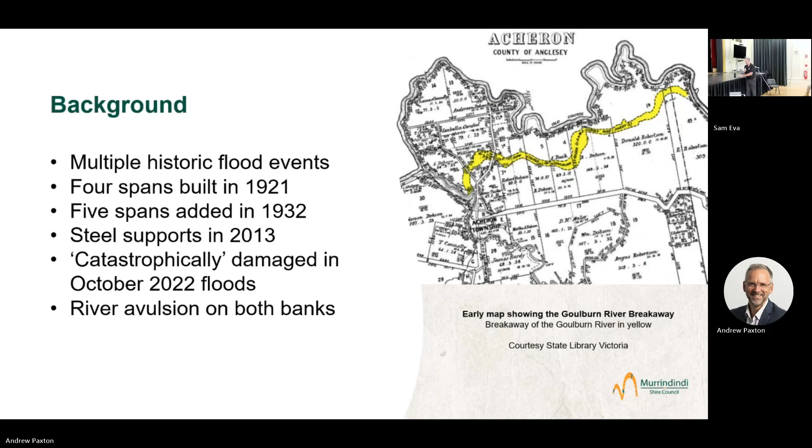The disaster recovery funding arrangement, you'll hear that on the way through. At our last meeting, there was a heavy conversation around, is council insured or not insured? Council insures its assets - buildings, parks, things like that. Our critical or essential assets across the whole of Australia are covered by what they call the Disaster Recovery Funding Arrangement, which is between the state and federal government and how they support councils. So in that flood event in 2022, all the councils collectively had more than $500,000 worth of damage. Therefore, it falls straight into it and they assign it a number, and you can make claims against that in that process. So all the critical assets - roads, bridges, culverts - are covered by the Disaster Recovery Funding Arrangement, state and federal agreement.

The important part of that is it restores the function of essential assets. So if we had a road that had potholes in it and then gets washed away, we don't get funded for the potholes that were in the road. We only get funded for the state the road was in and the function the road had prior. There is an ability to claim immediate protection works, and you may remember after the floods, the rock embankments were put on the side. That was funded through this process to protect the banks and stop them further eroding. That falls under immediate protection works.

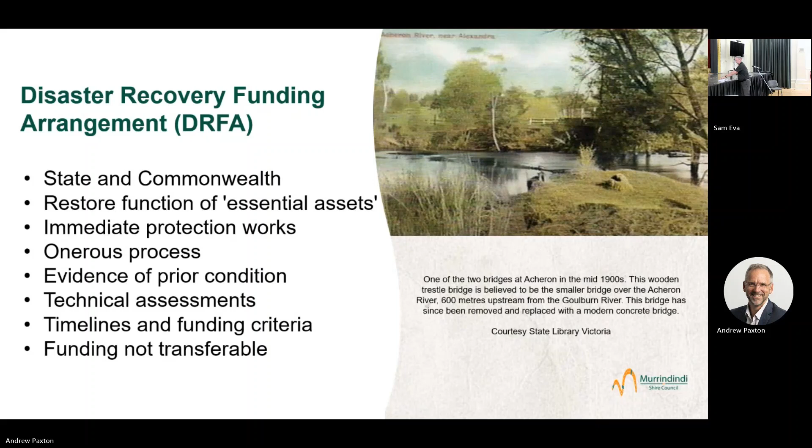As you can imagine, with any government process, life is not always easy. There's a whole series of agencies, especially when you're dealing with water and rivers and roads. So we've got the Goulburn Broken Catchment Management Authority - they're responsible for the bed and banks of rivers. We've got Goulburn Murray Water, responsible for the water flows and some of the bed materials. Emergency Recovery Victoria, they coordinate claims with the federal government. We've got the Department of Transport and Planning, who actually assess the claims to make sure they're valid. We've got the National Emergency Management Authority in Canberra, that then has to say we're satisfied, that Victoria's satisfied, that the auditors will be satisfied to get the money back. And we've got council engineers, because we end up inheriting the asset and need to look after it, or we need to actually justify what we're doing for the ratepayers.

So I'm just going to start with a bit of the background, and I'll hand across to Peter to talk about the detail and the technical assessments.

Once an asset is damaged, and this one, we had to get technical assessments on the banks first, a design, have that approved through the department, and then we could put the rock beaching to protect the banks. At the same time, our engineers have gone through and engaged engineers to assess the bridge structure, the footings, the banks of the river, and all the other elements.

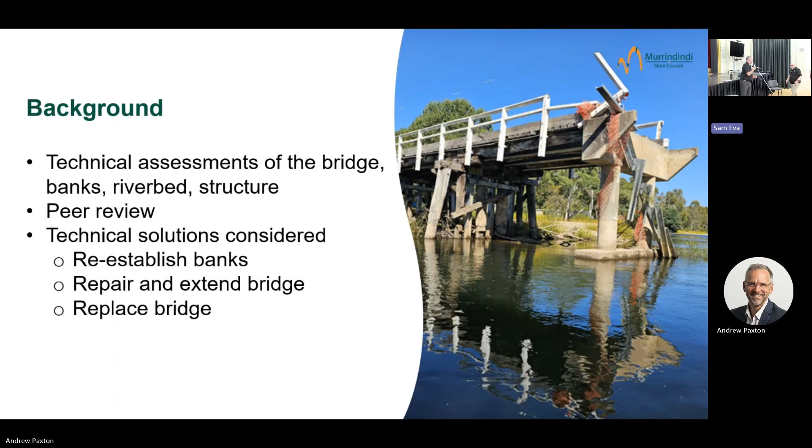Thanks, Andrew. I'm Peter Bain, the engineering manager from the Shire.

So after the '22 flood, we did initial investigations. We made our initial claim through the DRFA process in '23. And since March, we've been on the treadmill trying to get the approval through to continue the work, to actually make a decision as to where we're going.

So think of it as the insurance, as Andrew said. They'll only fund for replacing our bridge with exactly the same function, not necessarily the same bridge, but the same function, a single lane bridge. Now, since it's over 100 years old, the bridge standards have changed considerably, and safety standards. So we had this big long argument about which standard we were going to use and what level. That's been going on for some time.

Our partners, such as the GBCMA, have been also doing some studies, and they've done a report for us talking about what the river's going to do, and that's coloured the process that we've got at the moment. So they're saying that the river is moving and it will continue to move, and it's likely to move north and east.

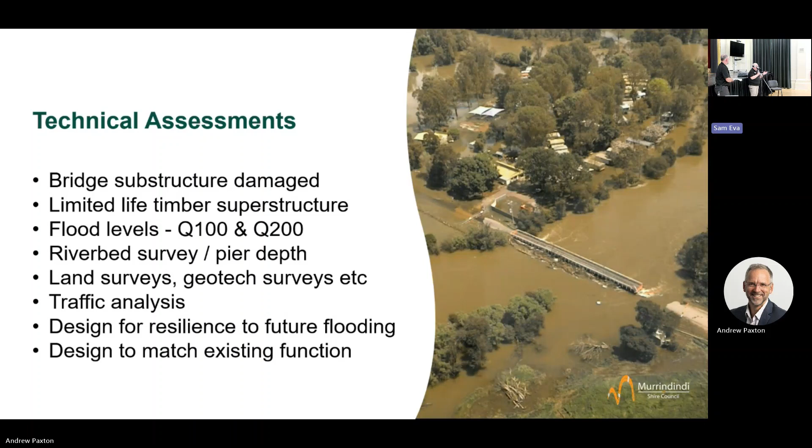The Commonwealth and the state have sort of agreed on how much they've got to spend on the bridge, and we'll see where we get to. So the scenarios are single lane, or dual lane, which we prefer from a safety point of view. And if all else failed and we had no money, then the community decision is that we'd have to close the road and the bridge.

So the state government, in that whole approval process, we've had to demonstrate. Initially, it started out, they said build the banks back to the bridge. The CMA said no, not allowed to adjust the river flow. So now we've got everyone aligned and saying the river flow can't change. And they've agreed to a quantity surveyor estimate saying what would it look like, what would it cost, what are the orders.

That's how controlled it is. They wanted to see what we're actually asking in that tender document and make sure it's clear with what's in their scope. If you've seen council's budget, you'll know very clearly we're not in a position to build the bridge or to top up funding for the bridge. So the gold plating version is not an option for council.

We went out to the tender process for multiple options so we could make an informed decision. At the moment, it's a quantity surveyors and engineers estimate of what it's going to be. So by going out to market, we'll know exactly what the true accurate figures are, what the timelines are, and any conditions tied to that. So that's gone out to tender, and anybody who follows our web page will notice that's on there.

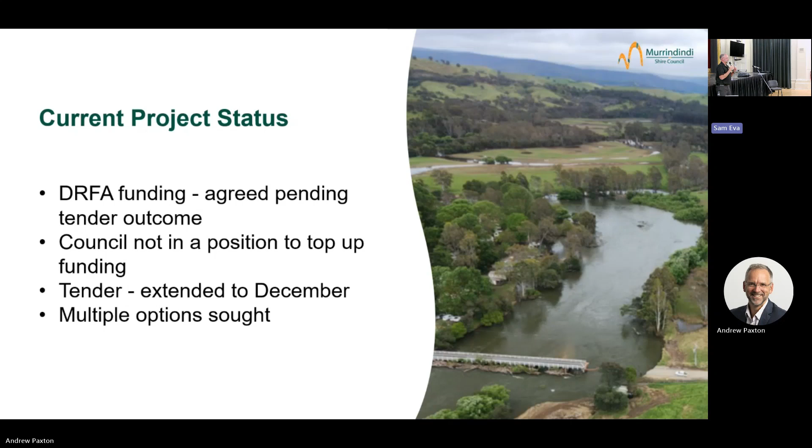With anything, everyone in this room would have differing views or different aspects on views and would weight things slightly different. We've heard there's an additional cost for business. We've heard the one way in and out in an emergency is an issue. We've heard that response times for emergencies is increased to get to different areas. We hear from the community it's physically divided.

It takes more time to connect with neighbours and work. The loss in local spend at the caravan park from having to drive further around, when in the past they could duck into Alexandra, and the grandfather test. People say, what are you going to do for the future generation? What's the long-term solution? What's not just today? What's not the Band-Aid? What will my grandchildren appreciate?

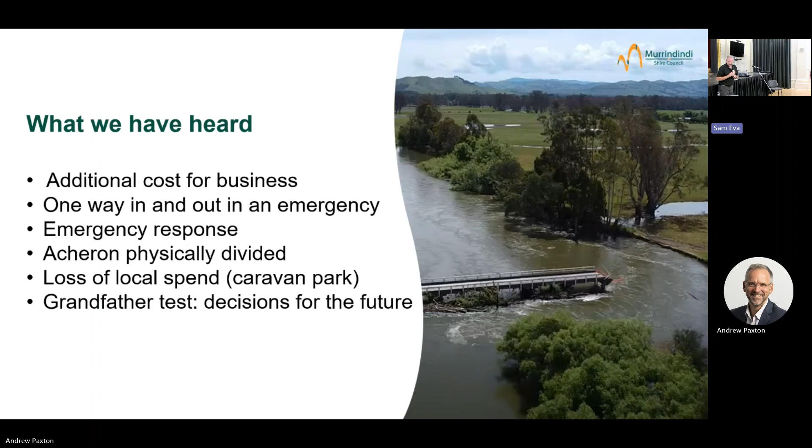We also heard some people that would prefer no bridge, and they said that will increase traffic. We've also heard that having the increased traffic will lead to safety concerns of speeding traffic and increased use of heavy vehicles through that area. We've also heard very clearly that there's concern about increased traffic going through Alexandra and Grant Street and the impact that has, and also on the intersections onto the highway.

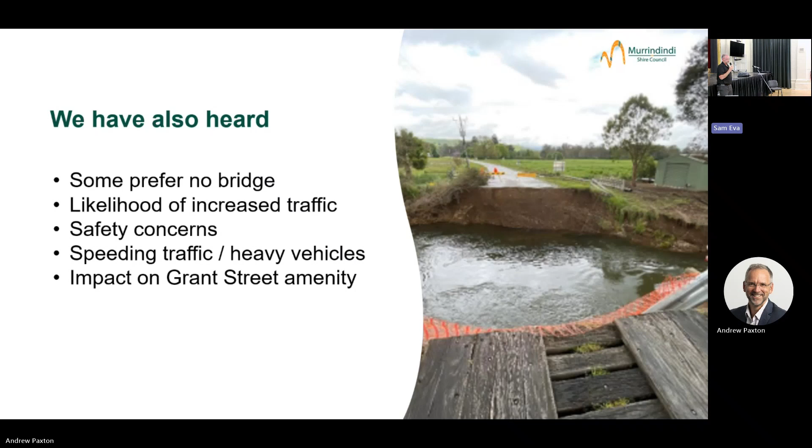So we have been listening. We've got a whole lot of feedback, and I've just tried to see them at that high level just there.

Some of the options that we've explored was to repair the bridge, that was to extend the existing bridge, as the assessors originally said you need to extend it. That's over 30 metres in extension to the bridge, and the engineers all said it will fail in the future. There's a really good chance it's going to fail. It's a case of how quickly it fails if you extend the bridge, and how do you tie a modern structure or a heavy-duty structure to a timber bridge that is moving when you're on it. So finally we've got the engineers with the state and council and all the specialists to agree that's not a feasible option to extend the bridge.

The option of bringing the banks out to the bridge has been dismissed as not an option. We cannot do that.

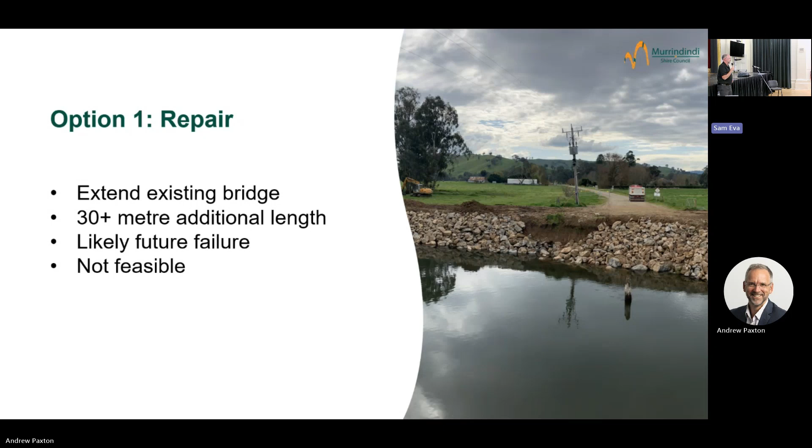The option of replacing the bridge, that's constructing a new bridge. There's two options there which exist. One is a single lane bridge like we had in the past. The second option is a dual lane bridge. Whatever we do, we need to build back something that our grandchildren and future generations can make use of. We don't want to be back there replacing and fixing the bridge every time.

We know that we made submissions to the flood inquiries, and we asked and pleaded for Eildon to be used to stop flood events. We made submissions to the inquiry. That option of using Eildon to hold back water in a flood event was dismissed by the state government. So that's not an option.

We know the river's going to go high. We know we need to build a bridge that can either be topped by water going over it, or is strong enough to take that, or is up in the air and can deal with that. We know that we can't build a bridge to the standards of the old bridge. It has to be built to a contemporary standard. If you look at the bridges of the past compared to what they are now, the expectation from the community and people who drive on those is a contemporary standard. It has to meet safety standards. And that will lead to being that increased deck height or being able to be topped by water going over it in a flood event.

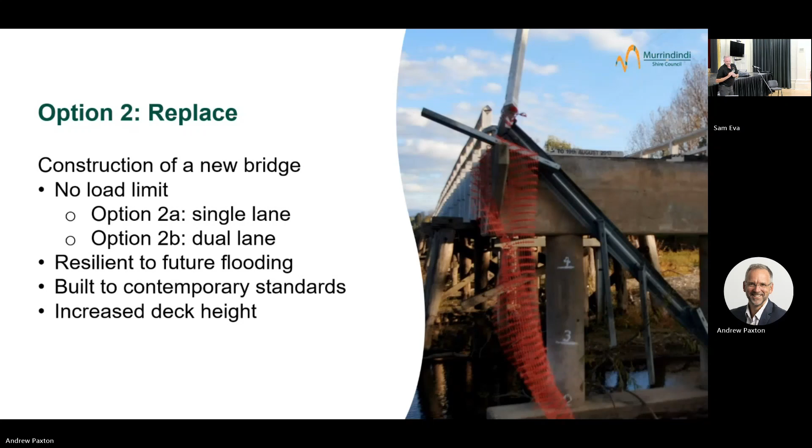The option of no bridge - so in this process, the DRFA agreed it is an eligible event. They have agreed it's an eligible asset, and its replacement can be funded through that program. We can't take the money and run, and it is deemed as a critical link or a part of our transport network. And their advice is it's not really an option to say no to a bridge.

So the default position at this stage, while we've gone out to tender, is to restore access and construct a resilient and a functional bridge for the future. That doesn't mean a decision's made. It means we've gone out to the tender on a range of options that includes that as a premise.

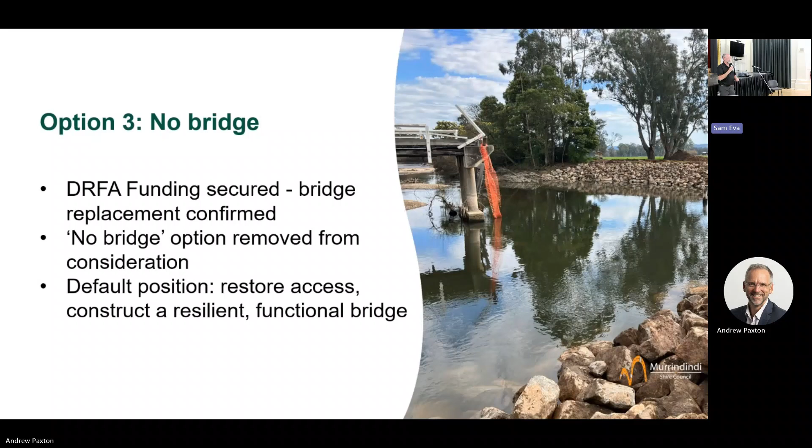So with the 2A option, the DRFA have signed off on that being in the tender documents. A single lane bridge, about 105 metres long, in a foggy environment.

That's why it needs to have traffic lights, and it will need a backup supply, because we know the power went off twice here yesterday. We know power goes off, so it needs stuff there to make sure it's safe for the community in a foggy environment when the power goes off.

The 105 metres is a long way when you can't see over the crest of a bridge, or you can't see that length in fog.

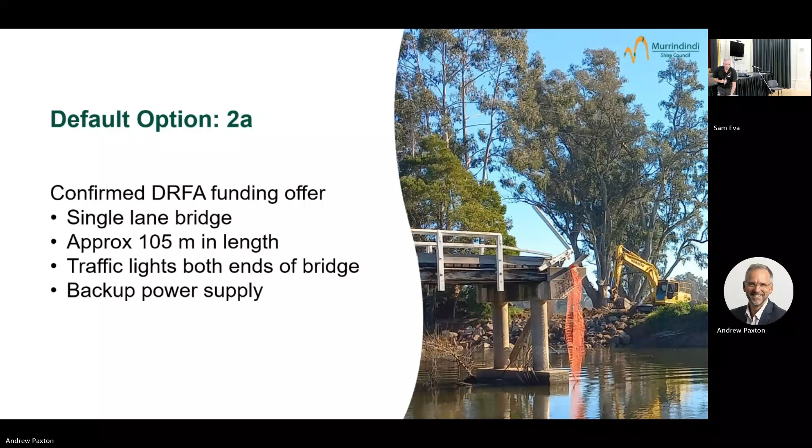The way forward, we're currently out to tender. It's a complex tender document, because we're saying here's all the constraints, here's some thinking, but you tell us how you think you can build a bridge that's not going to get all the tree branches snagged on it. We'll be safe, we'll have a clear span, and there's so many different ways of building bridges nowadays.

We're seeking options for a single and dual lane, and any other alternative designs which they can come up with in that process.

The negotiations for funding will continue. We've got notional agreement on a figure subject to what occurs through the tender process, and whatever comes up on that in the next few weeks, we'll need to sit down with the funding agencies and say, is this in the realms of reality or is it off the table? So we don't know that answer until we get a fixed price.

The solution will need to be approved by council, it's a large tender, and by all the funding agencies.

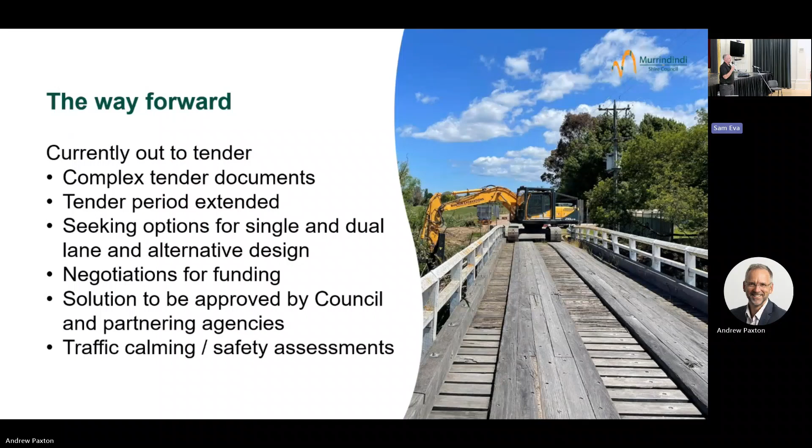We also need to look at what other traffic concerns are coming. If we're doing the bridge, what else do we need to do that addresses the concerns that people have raised around traffic speeds, intersections and things like that? What else do we need to do that's complementary outside the DRFA funding? If they won't fund that, what else does council need to find funding for to address other issues that may come as a result of replacing the bridge or not replacing the bridge?